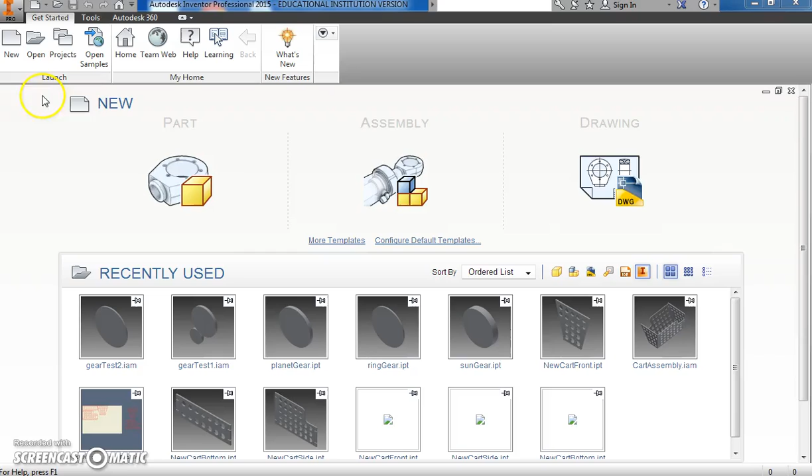Alright, I'm going to show you how to make planetary gears today, hopefully pretty quickly. So the first thing we're going to do is create a new part. I'm going to create a sun gear, a planet gear, and a ring.

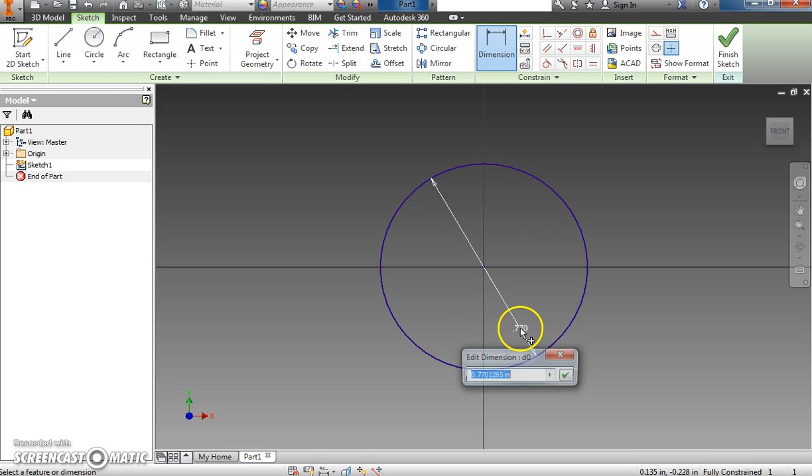My design is that I have a sun gear that is a 1-inch sun gear, so I'm going to create that right here, 1-inch diameter. Then I'll do an extrusion of 0.125, so 1/8 of an inch, and I'm going to save that.

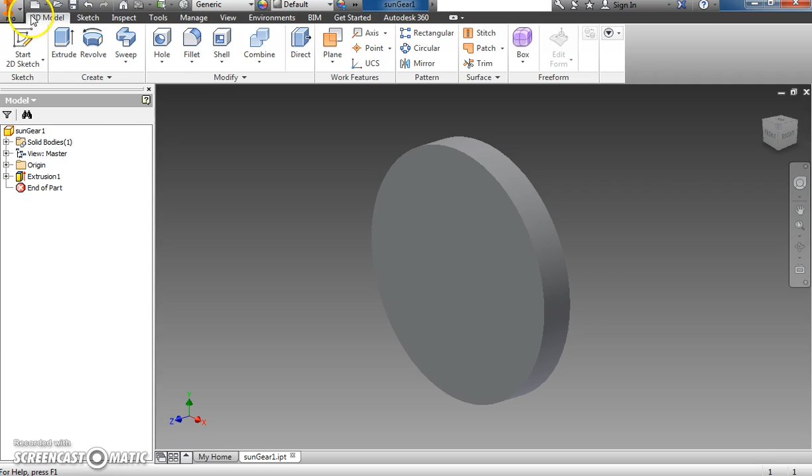I'll save that as Sun Gear 1. Then I'm going to do a save as and call this Planet Gear 1. And then do another save as, and this will be my ring gear.

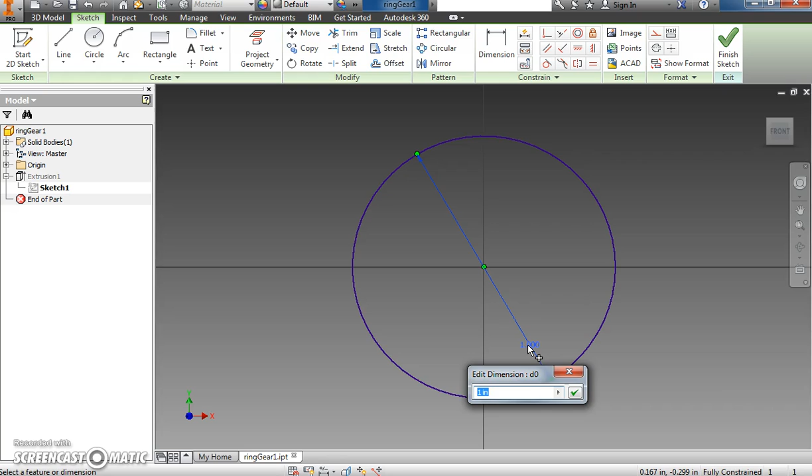So this will allow me to change my ring gear. If I have a 1-inch sun gear and a 2-inch planet, that makes a 2.5-inch center to the outer edge of this ring. Let me show you what I mean. If I put a circle and make this 1 inch, and then another circle at 2-inch diameter, and put them tangent to one another, you'll see that fits right in there. That's perfect, this 5-inch diameter for this one. So that's correct, there's my ring gear.

I'm going to go ahead and open up my planet and change the diameter of this one to 2 inches. Great, so there's all my gears.

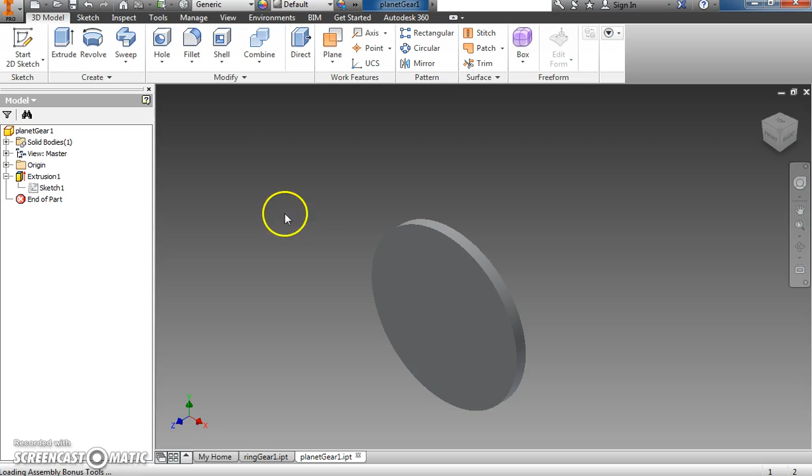Now I want to create a new assembly file, and I'm going to place both the sun gear and the planet. Then I'm going to constrain them. I'll do a flush constraint on their faces, and then a tangent constraint, because that's how I want them to interact.

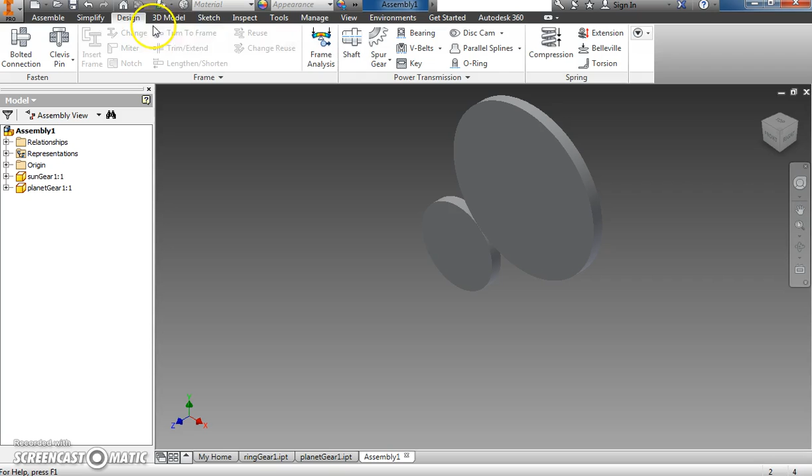Now I can go through design, spur gear, and we'll call this gear test 3. Okay, now it brings up this dialog box. Here I'm going to have teeth, I'll just make this 10 teeth, easy, that makes this 20 teeth.

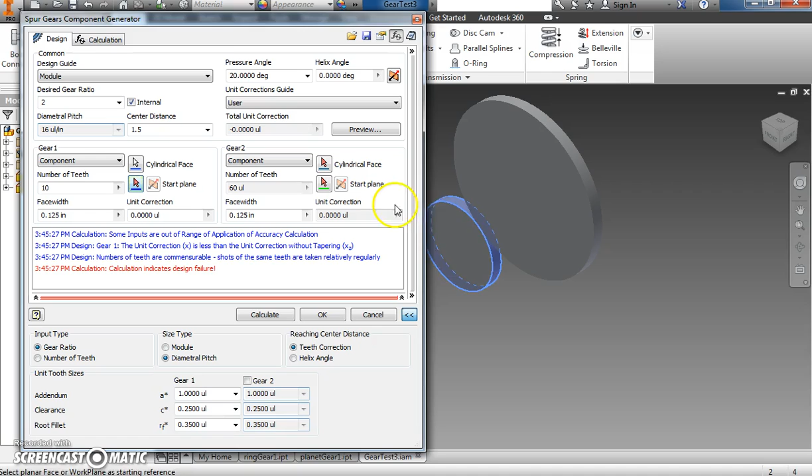I want to change this from module to center distance. This is 1 inch plus 1/2 inch, so it should be 1.5 inches for the center distance. Desired gear ratio is 2 to 1. I'm going to pick the face and the plane, and push them backward. Face width is correct.

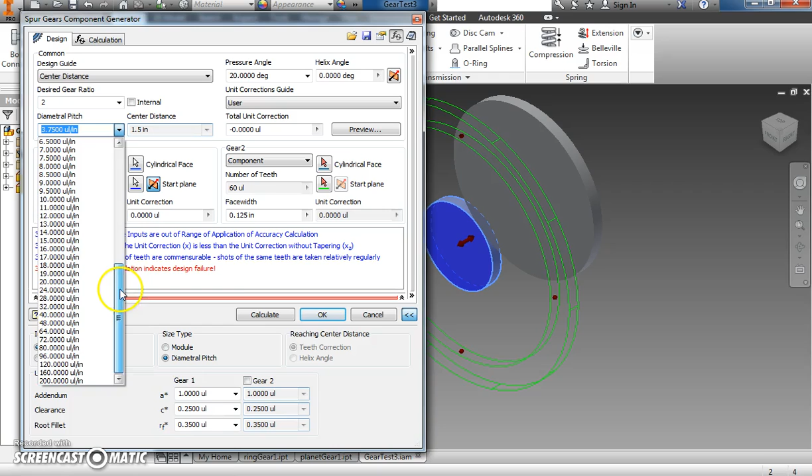This pitch is wrong, so I want to find the pitch it needs to be, based on number of teeth. It's not going to be internal. Center distance, there we go. Let's change this value. Too big. Too small. That's just about right, so it's somewhere in there.

If we click on calculate, it should give us the values we need. And this looks pretty good.

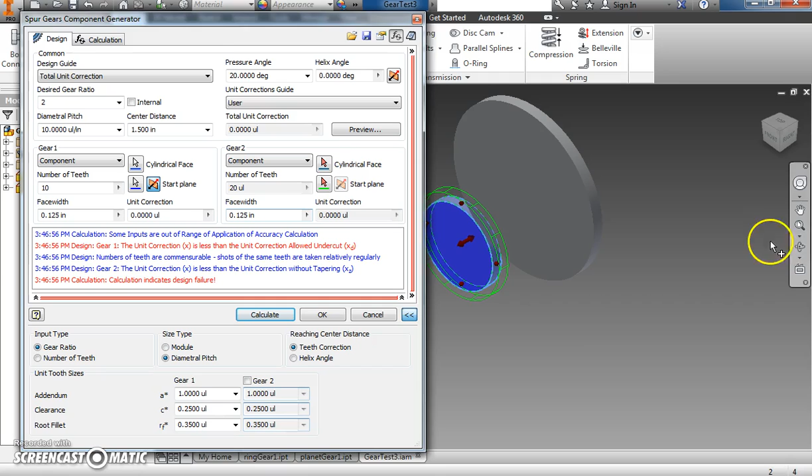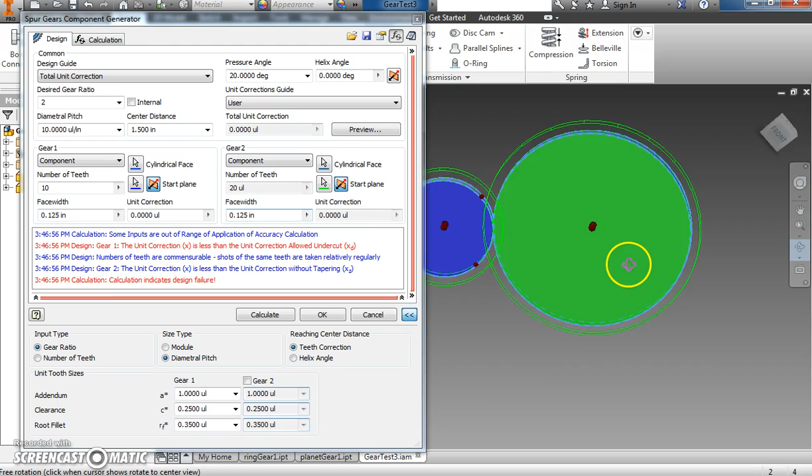So let's fix this one. We want component 2, this to be the face of it. We want that ring, we're going to pick this face, and push it back. That looks good, so now we're going to click calculate, click OK, and do accept.

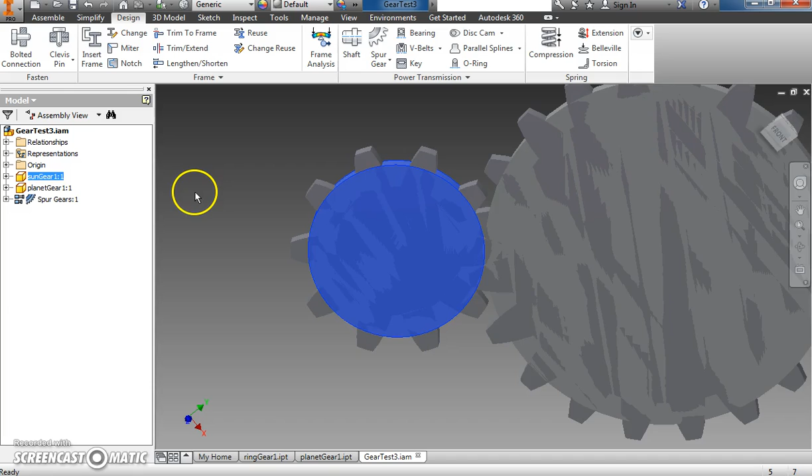That should give us our gears, and there we go, so there's our gears. You can delete these pieces now since they don't need to be in there. But if you look at this, there's some problems with our teeth, see how they kind of rub right there? So we need to edit this so that doesn't happen.

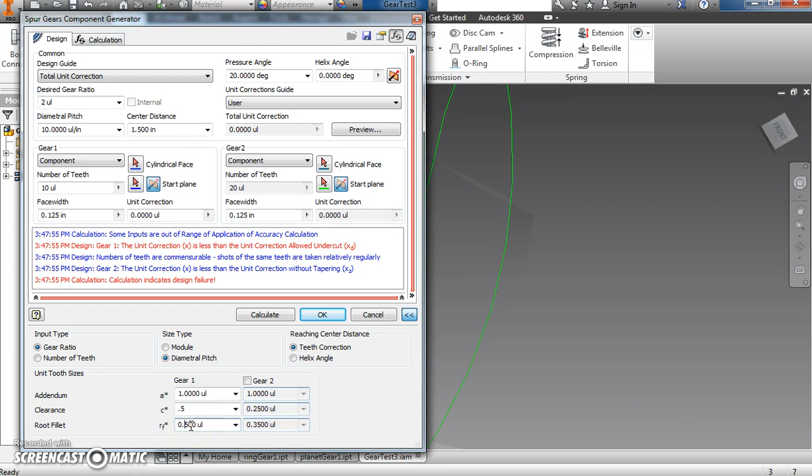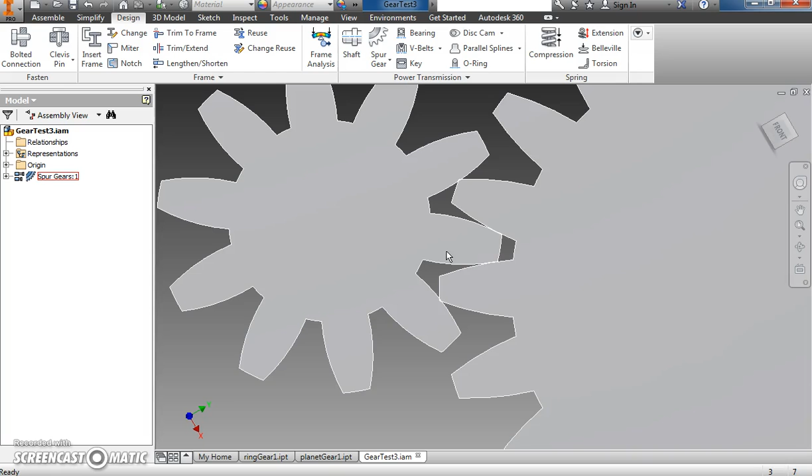To do that, you can change these addendums and clearance values, and these radius values, click OK, and you should see a difference. You can start to see how we get more spacing in there for our gears, and adjust that so we can see through there and these teeth aren't bumping into these places. Adjust those numbers - the other gear video does a great job of explaining that.

I'm going to take this back and take a look at those numbers real quick. Okay, so 0.5 and 0.5 for these values, and I've got these kind of memorized now, so I'm going to click OK. This is good.

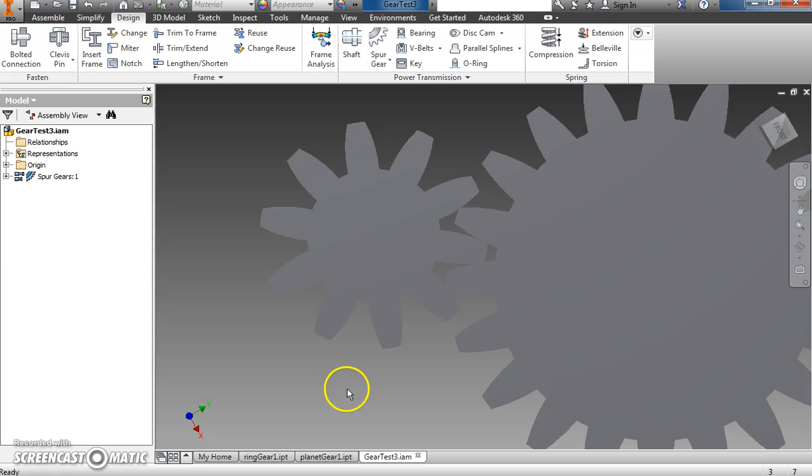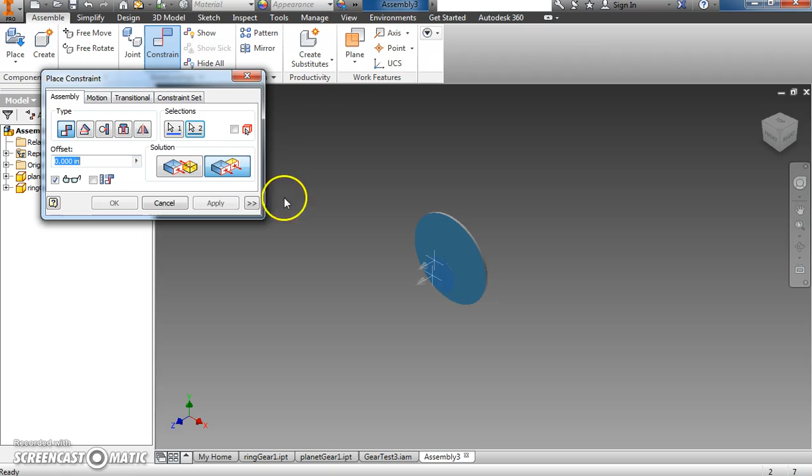Now I'm going to do a second assembly, so I'll do a new and another standard IAM. This time I'm going to place the planet, and place the ring. I'm going to do the exact same thing, constrain the faces, and then do a tangent, but this time an internal tangent.

So I'm going to tangent this guy with this, so now they're inside of each other, just like they would be. I'm going to go back to my design, spur gear, and save it as gear test 4. And here's where we have to do this correctly.

This is going to be a 2.5 gear ratio now. So now we have 20 teeth on this one, and this should be 50 teeth on this one because it's a 2 to 5 - it's a 2-inch diameter, and this is a 5-inch diameter. And we want it to be internal.

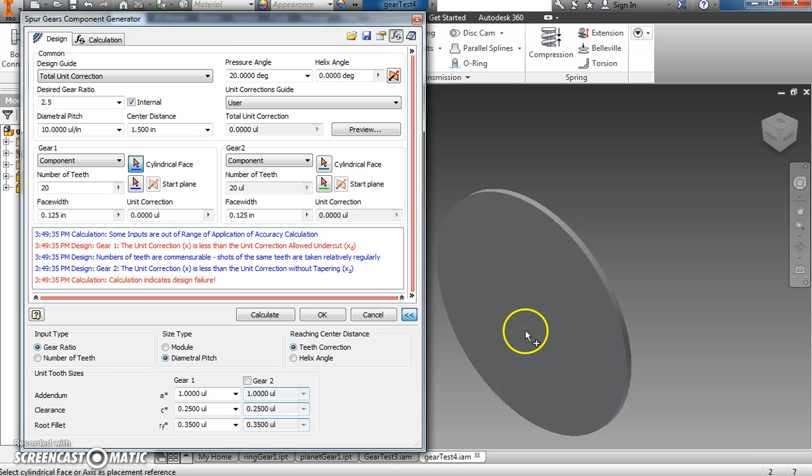So we're going to pick this cylinder and pick this face, and then push it back. And then for component 2, we're going to pick this cylinder and this face, and push it back. Center distance now is 2.5.

This is the center distance of this gear, is how that's measured, I believe. No, it's not, this is still the same, it's still 1.5. We should be able to go to calculate, and there it is. These are all the same.

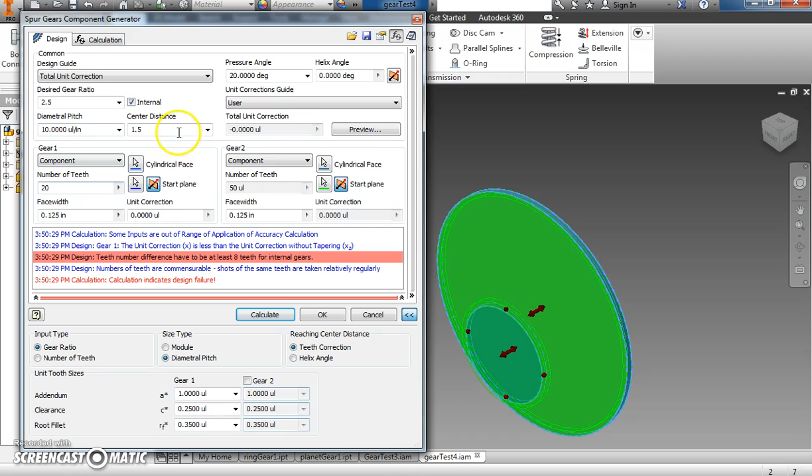This looks good, so you could do a preview and look at the teeth mesh, and then you could adjust your addendum stuff at this point. We do have to change that because this was a 0.5 and this was a 0.15.

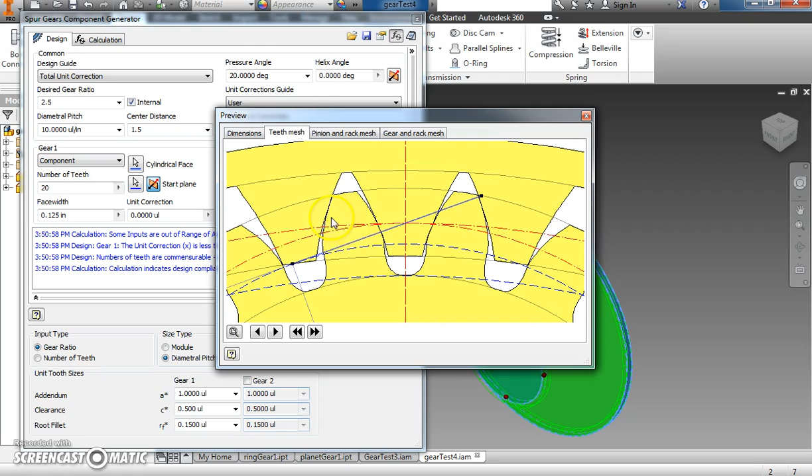Let's close this, calculate again, preview, and you can see that mesh is a little bit better. But again, I would adjust those numbers until it's good. Then I'm going to click OK, and this should produce my 2 gears.

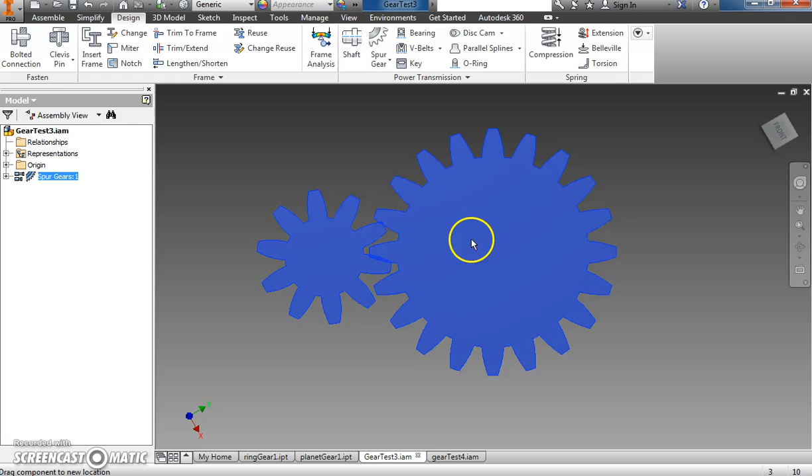Now I can delete out these 2, and now these 2 planet gears are identical. So if I pull this assembly into this assembly, these 2 planet gears are the exact same. That allows you to have a ring gear, a planet gear, and then you can add in more planet gears with your sun gear in the middle.